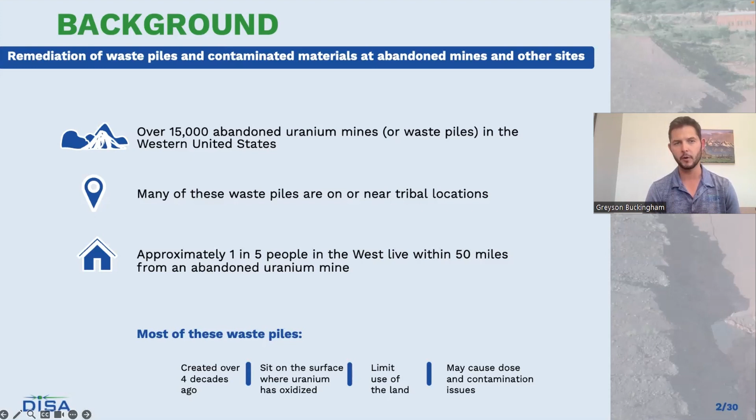And all these mines primarily were mined during the Cold War. The Atomic Energy Commission was largely responsible for purchasing and advancing the mining of these different sites. And there wasn't really a lot of oversight on these sites until 1978 with the passage of UMTRCA, and then later EPA regulations came about in the early 1980s. And so a lot of mom and pop shops would start mining operations. They would try to take the high grade ore, transport it all the way to a mill, where it would then be converted into U3O8.

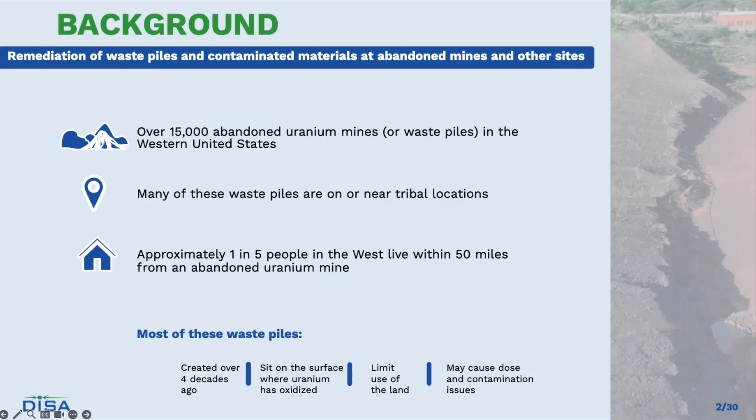But the low grade ore that wasn't economic at the time, they just left on the surface. We didn't really have a great understanding of what that meant, and a lot of folks thought that it was benign to leave that material on the surface. But over the decades, as that material has sat since the Cold War, it oxidizes, the uranium and radium leach into the waterways, and those dust particles blow into population centers, to where today we've determined that there's a lot of negative environmental and health impacts to nearby communities by allowing these waste piles to continue to sit on the surface for decades to come.

And so this is an example of a waste rock pile, not to be confused with mill tailings. This material has never been processed or treated. It's just been dug up from the ground and left on the surface. This is a site in Western Colorado that was the first site where we really started testing the effectiveness of our technology. That site's been sitting there since the 1970s. And even when uranium prices were at $130 a pound, it still wasn't economic to transport all that material to a mill to be converted to U3O8. And without a large federal mandate to clean these sites up, it'll continue to sit there indefinitely.

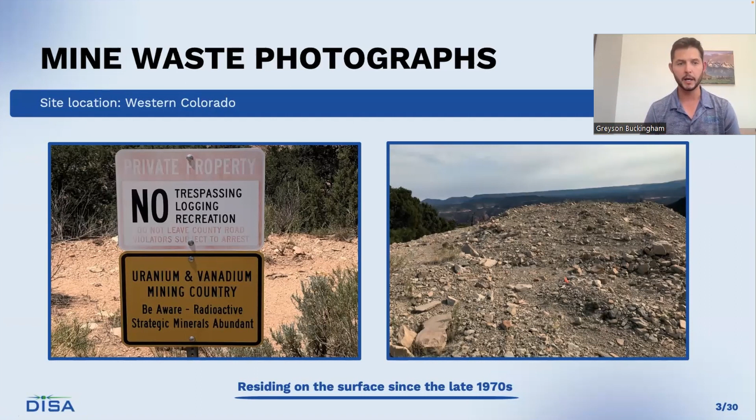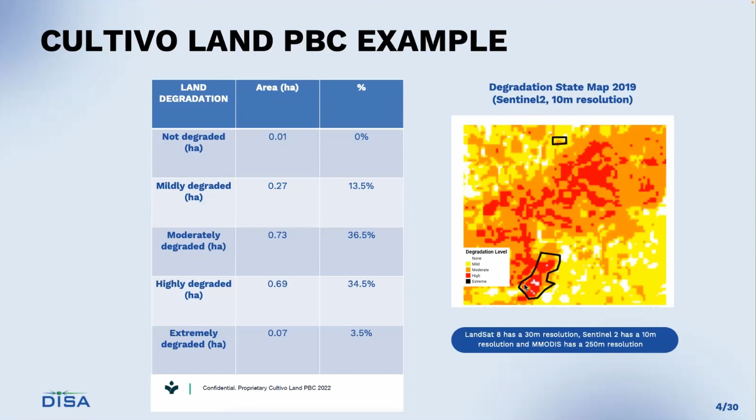Just looking at the overall market view of these different sites. So, specifically for the defense-related uranium mines, there were over 4,200 of those legacy defense sites that were mined. And then the other 15,000 associated with uranium that produced during that time approximately 75.9 million tons of ore. Many of these sites are remote, and only, as I mentioned prior, the highest grades were shipped off due to high shipping costs, and then the lower grade ore was stockpiled on site.

So we've collected a lot of data. We worked with this company, WWC Engineering, to do an assessment of these different sites, looking primarily at the Four Corners region. They determined that the maximum grades are about 0.15% uranium and 0.6% vanadium. So relatively very low grades. But as I had mentioned, it's that long-term exposure where these health consequences can start to be more largely felt. And ultimately, the average grades on these sites, as averaged by WWC, are about 0.05% uranium and 0.1% vanadium.

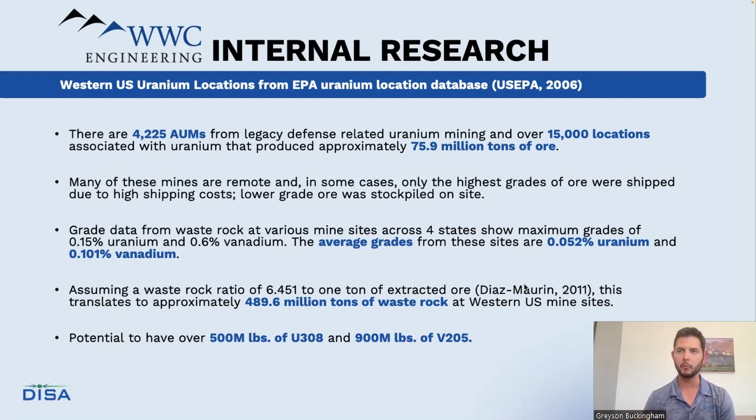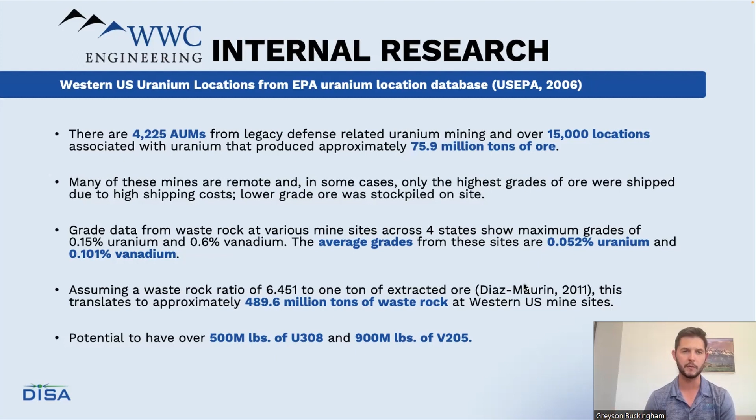And so a ratio that's used to estimate the amount of waste rock that was left on site versus the amount of ore that was sent to a mill, the common ratio is 6.451. So extrapolating, that translates to approximately almost 500 million tons of waste rock at these Western U.S. mine sites. And so there's the potential at those grades to have 500 million pounds of U3O8 and 900 million pounds of V2O5 sitting in those waste rock piles. And to put that into perspective, the globe consumed just over 100 million pounds of uranium last year. So there's a significant amount of uranium and vanadium that continues to sit in these waste rock piles today.

And so right now, the current condition is to do nothing. The only two solutions that have been used in the past, until our technology was recently validated by US EPA, is, at certain severe sites, to bury all that material on site, which doesn't solve the problem. The contaminants are still there. Those enhanced capping barriers can still erode over time, and with the erosion of that cap, that material could still leach into waterways. And so, in particular on the Navajo Nation, the nearby communities have significant concern about capping that material because the contaminants are still located on that site.

And then the second alternative is to take all that material and haul it off site. Well, as we just saw on the prior slide, there's 500 million tons of waste rock, potentially significantly more. It's just cost prohibitive to truck all that material off site and then to dispose of it. And we don't even have the disposal capacity in the United States to be able to handle that volume of material. So that's where we come into play, where we're a waste minimization technology.

I'll get into more detail about a treatability study that was sponsored by US EPA and Navajo Nation EPA back in 2022. But at present, we're the only validated treatment technology for abandoned uranium mine material, in particular in the Navajo Nation, where we can take all that volume of material, treat it through our system, and we effectively have two different streams. 80% of that material is typically clean enough to be left on site. And then you've got 20% of the overall volume that captures over 90% of the constituents of concern, which includes the uranium and radium-226, that can be either recycled or taken to a low-level waste facility. So I'll hand it off to John to explain exactly how the technology works.

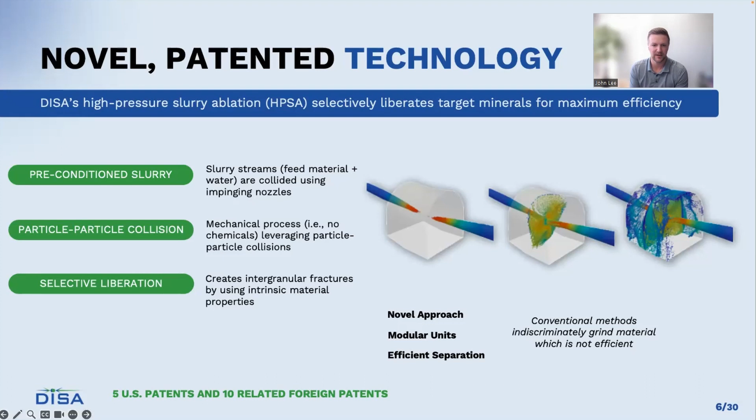Yeah, so hi, everybody. So the technology is called high pressure slurry ablation, HPSA for short. We call it HPSA technology. Essentially, what we're doing is taking this waste rock, mixing it with water to form a slurry, and then processing that slurry through opposing nozzles. So you can see there in the images, it's two nozzles pointed right at each other. The particles come together and collide and essentially form a particle-to-particle collision. This is important because we're using the particles themselves to break each other apart. Typically in the Western United States, the mineralogy we see is a quartz or a sand grain as that base mineral, with carnotite or other types of uranium minerals stuck to the surface of the sand grain.

So HPSA is essentially a selective liberation technology where we can take the technology right to the site without any chemicals, simply mechanically process this material and have a selective liberation where then we can concentrate and remove that uranium, vanadium, radium-226 in the fine fraction and leave a clean, coarse sand product behind.

So this is essentially where we're able to come to the site, pre-process this material and then remove just that target mineral rather than removing the entire mass of the site. And as you can imagine, this plays into the economics then, where you don't have to transport 100% of the material, but rather a concentrated fraction, roughly 20% of the overall mass.

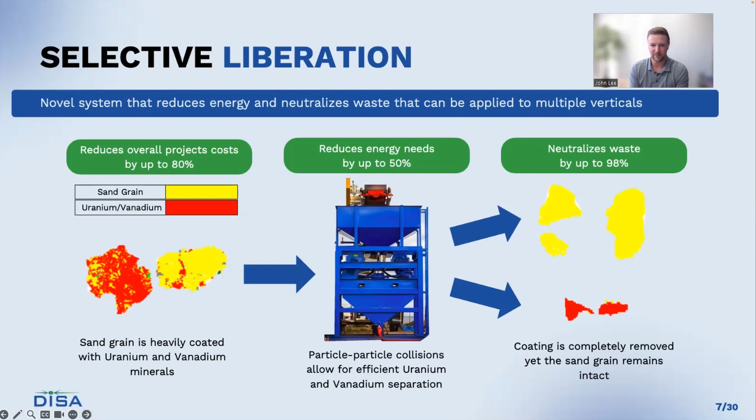So diving into our treatability study that was sponsored by US EPA in 2022, we went down to 3 sites on the Navajo Nation. And the US EPA and Navajo EPA were asking 3 main questions. How effective is the technology? How economic is it? And then does it work on a wide variety of material? In terms of how effective, we're looking at 2 main things. One is toxicity, our ability to reduce toxicity, and the second is leachability.

So for toxicity, we were able to remove up to 98% of the uranium. And for leachability, on all samples that we tested, we eliminated leachability concerns and brought everything below the water quality standard. And then in terms of economics, compared to hauling all the material off site, we were estimated to be 50 to 80% more economic than that option. And then we were able to successfully address those questions on all 3 sites where we tested the material.

So these are just some snapshots of select samples that we tested at those 3 different sites. So the starting amount, this is at the Old Church Rock mine. You can see there's 940 parts per million uranium in this particular sample and 228 picocuries per gram. After we run that through our system, we bring those levels down to 17 parts per million uranium and 18 picocuries per gram radium-226. And that is just in the fines, in 23.5% of the overall mass.

So what that means in that percent mass to concentrate is instead of now having to haul 100% of that material offsite, you now only need to haul 23% of that material offsite, and then the remaining 80% can stay on site as that clean and stable fraction, depending on cleanup goal standards. And this just shows what our recovery rates were of the uranium and radium-226. So significant.

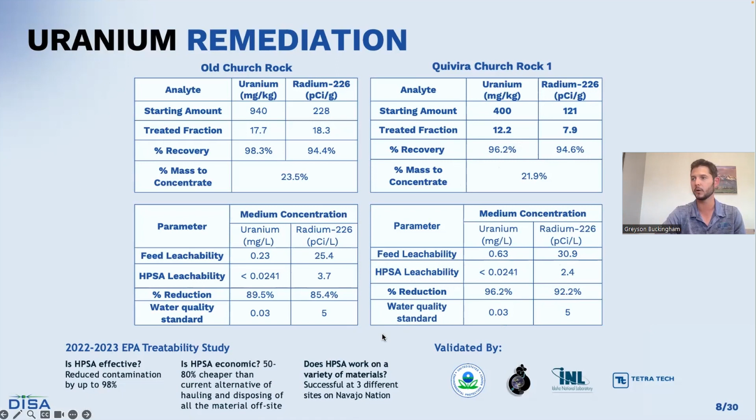So, this was taken directly from an EPA report, but these just show the key findings of that treatability study, which allows us to state that we're the only currently validated treatment technology for abandoned uranium mines. Their key finding: our technology was able to achieve greater than 90% reduction in uranium and radium-226 concentrations. The treated coarse fraction does not leach metals or radionuclides. And then we have different operating parameters, as John was walking through, that our technology can be deployed with to meet different cleanup goals.

So we can process material longer if you want to get lower goals, or if we're trying to achieve higher throughput, it's really just a matter of what our different velocities are, what our percent solids are, and the amount of collisions that need to be achieved to hit those cleanup goal standards.

And so the treated fines fraction requiring offsite disposal is as low as 17% of the original waste volume, providing up to an 83% reduction of the original waste volume. And just to know how important that is, it's a key tenet of CERCLA to engage in waste minimization when cleaning up Superfund sites.

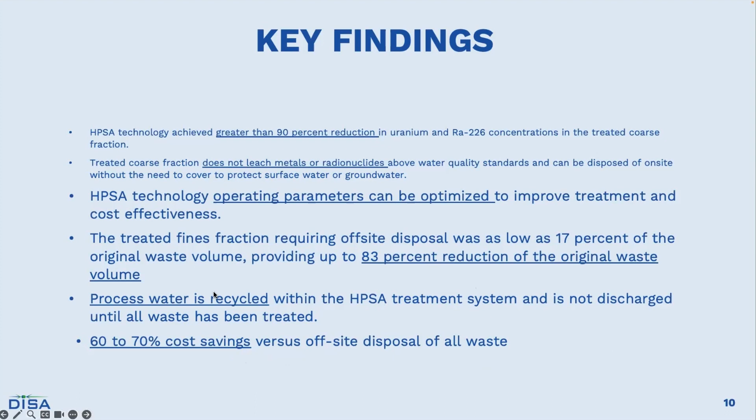One question we get asked a lot about is the water that we use in our system, because we do use water as a medium to transport the solids. It is recycled throughout our system entirely. We do lose a little bit of water in that dewatering process, which is the final step in our circuit, but it's about 10 to 15% moisture, which is what would be required anyhow for the compaction of dust for that site. So ultimately the water is a marginal cost, and at full commercial scale, running 100 ton per hour units, you would only need a few water trucks a day to resupply that water. And then, again, as we mentioned, significant cost savings of 60 to 70%.

So this is an image that we put together estimating that Quivira mine site. So this is how that cap sits now, over 1 million cubic yards. This would be the option of transporting all the material off site. On average, concentration grades for this particular site are 400 parts per million uranium. And there's over 1 million pounds of uranium located here, and the radium activity is quite high at 121 picocuries per gram. Each truck located here represents 450 trailer loads at 16.7 cubic yards each.

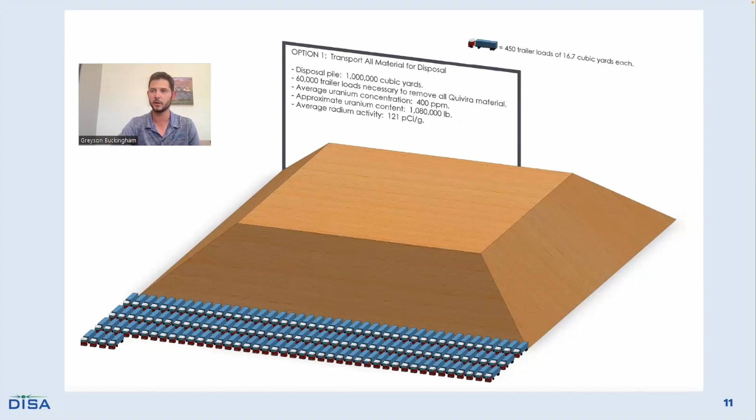So 60,000 trailers would be needed if it was ultimately decided that all this material is going to be hauled off site. So not only is that significantly expensive, but it's also a major impact to the local community with truck traffic going back and forth. I think I saw one report that estimated over 13 years of trailers going back and forth to dispose of just this one site. And on the Navajo Nation, there's 523 of these abandoned uranium mines.

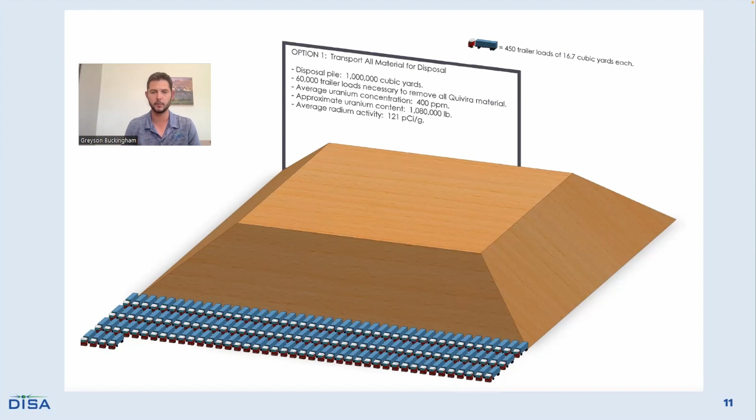So the other option being contemplated is to cap all the material in place. Here, we estimated a 3-foot cap that would be used. So 65,000 cubic yards of cap material would be required to be brought on site for the capping. And here you would still need 3,900 trailer loads to just cap that material.

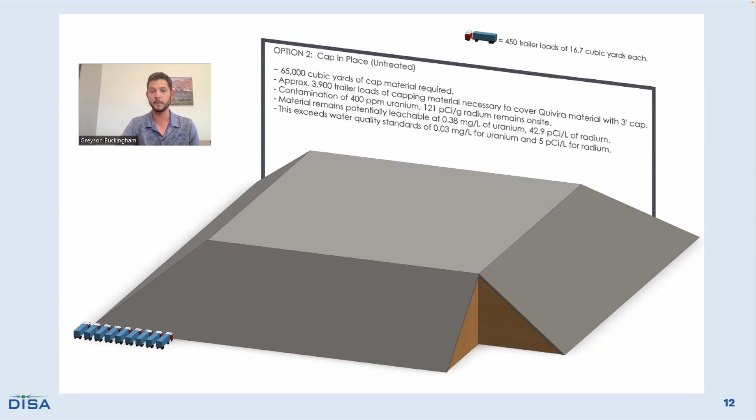And the major issue with this option is that uranium and that radium-226 still remains on site. And that material is potentially leachable, especially if that cap erodes over time and there's disturbances there, which would exceed water quality standards. So you're not solving the problem, you're just burying the problem, and it's still going to be there throughout time.

So what our option looks like here is the HPSA treatment. So assuming that we're reducing the volume that would need to be taken off by 80%, this is the 20% of the fines that would need to be disposed of. You can still see there will be trailer loads needed to move that material off site. But we're getting over that 90% recovery, and so there's 1 million pounds of uranium, which even has the potential to be recycled and put to productive use, and which could even help further reduce the overall project cost for this.

And then now this pile, you would still have 781,000 cubic yards that could be cleaned and reused, depending on the land use levels, where we've brought the average radium activity in this example below 8 picocuries per gram, which achieves that open land use limit. And then the material leachability has been reduced to below those detection limits, so there's no longer that threat. And then we also have, if there were certain cleanup goals, the ability to retreat that material and potentially reduce uranium concentrations to as low as 2 parts per million uranium and 1 picocurie per gram radium-226.

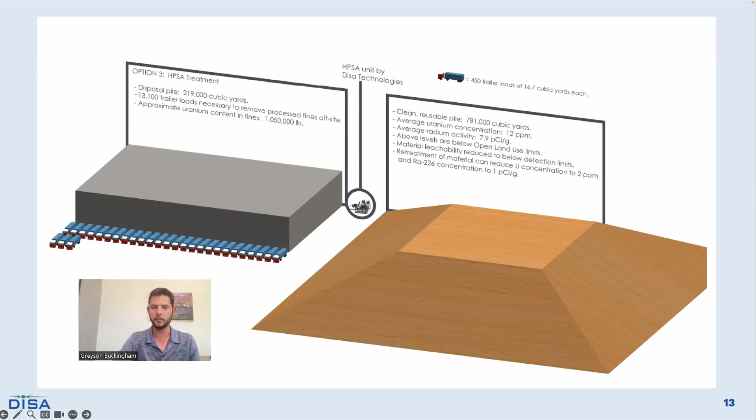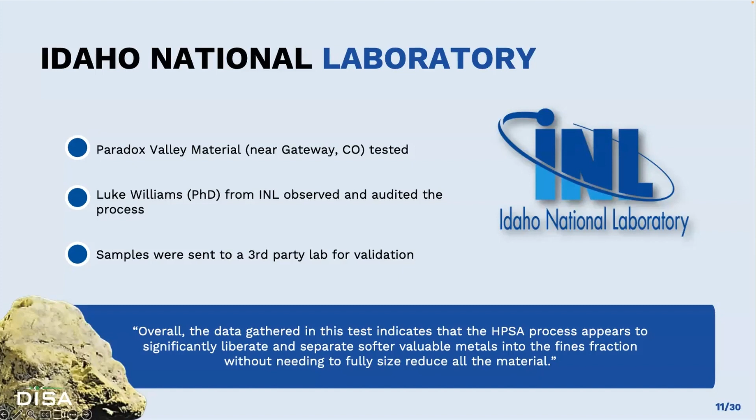And with that, I'll hand it back over to my colleague to talk about the status of our technology. Yeah, so like I said in the introduction, when we started the company in January 2018, we had one small laboratory size unit.

So most recently, we've really grown our team and started to scale the technology from an engineering perspective. A lot of people have commented, hey, it's great that it works in the lab. What does it look like at scale? So this past year in 2023, we built what we call Gen Bravo. Gen Bravo is just the name of the concept of the technology as it continues to scale. That technology there is for 5 tons per hour.

As Grayson mentioned in the beginning, not only does it work on remediation of abandoned uranium mine waste rock, but also traditional minerals processing. So that unit's at a phosphate mine right now, processing continuously at 5 tons per hour. It is a platform technology, so it can work on a variety of different minerals processing applications, but the same technology is applied to the abandoned uranium mines. So it's validating that scale at another application.

The Gen Charlie 3.5 ton per hour unit, we just built that this year, 2024. That's going to a graphite plant up in Eastern Canada in the next week. And then this Gen Charlie 20 ton per hour, that's a unit we've engineered, and we're finishing building that and shaking it down. That would ultimately be the unit that is deployed as the next scale to an actual abandoned uranium mine.

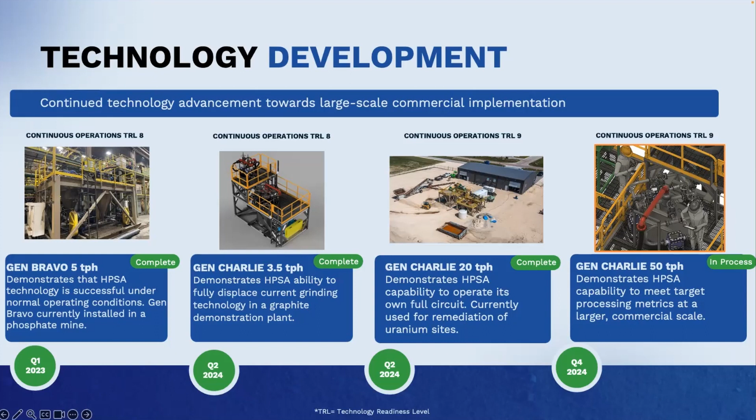And this just shows an additional picture of that 10 to 20 ton per hour unit I was talking about going to an abandoned uranium mine. This is representative of what it would look like if it went to an abandoned uranium mine. In the upper right corner, you can see some conveyors, some screens. We would take that material as it sits as waste rock. There might be larger particles. Those particles or rocks might need to be pre-screened out.

And then the material is fed into the DISA system, mixed with water to form that slurry. And then ultimately it goes through where Grayson's mouse is, that high pressure slurry ablation, or the DISA portion of the process where that liberation and particle collisions take place. After we've liberated the uranium, vanadium, and other constituents of concern, we then screen the material on the backside. Again, the uranium and vanadium and radium all settle into what we call the fines fraction, essentially the very, very fine material. So we're just separating it based off size with simple screens.

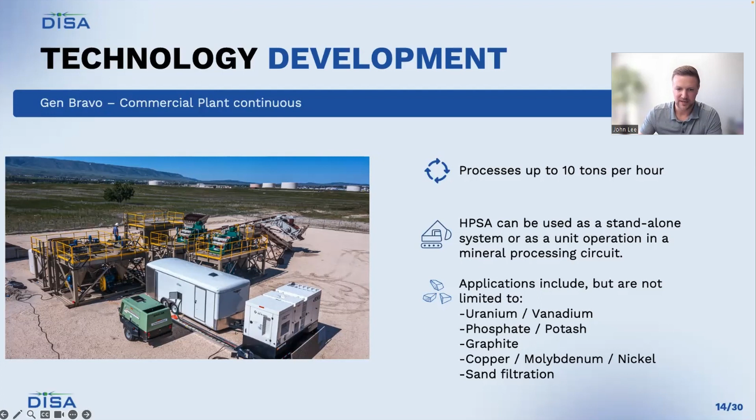And then the coarse material, the larger material, is the clean sand that ultimately goes back on the site as that safe and stable fraction. Yeah, so with that, we'll conclude our technology presentation, but in sum, what we're really passionate about at DISA is, how can we start advocating for a nuclear renaissance when there's still many legacy sites of the past, and we need to get this cleaned up. And what we're really excited about is that we have a solution to do so in a way that's economic, that's sustainable, in a lot of ways doesn't even require taxpayer dollars, because we're able to recycle the material to help pay for our remediation activities.

And furthermore, when we're a country that imported over 47% of our uranium from places like Kazakhstan, we can help offset bringing in sources of uranium from places of the world that aren't as friendly, like with the recent ban on Russian uranium. And we have those resources here in the United States, and we can do so in a way that remediates these legacy sites that have been out there since the Cold War, and helps foster this nuclear renaissance. I know everybody here on this call is very excited that that's starting to occur.